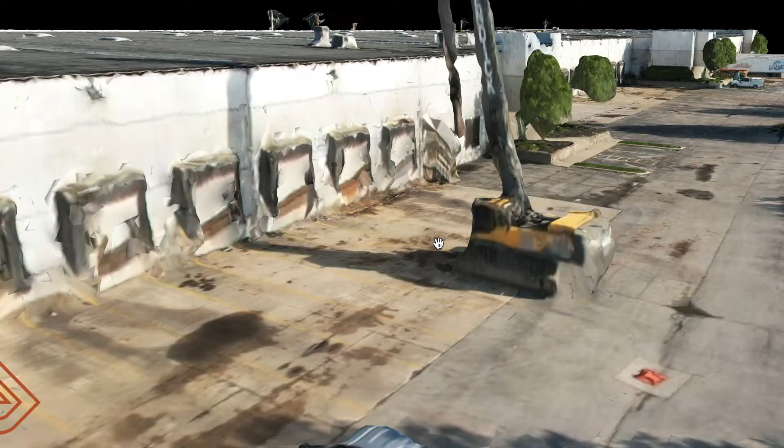So I work for this company called FlyGuys, and you can sign up with them online just with your Part 107 commercial pilot's license and your driver's license. Since I have both of those, I just sign up online and then you wait for them to reach out to you with drone jobs in your area, and they're all across America.

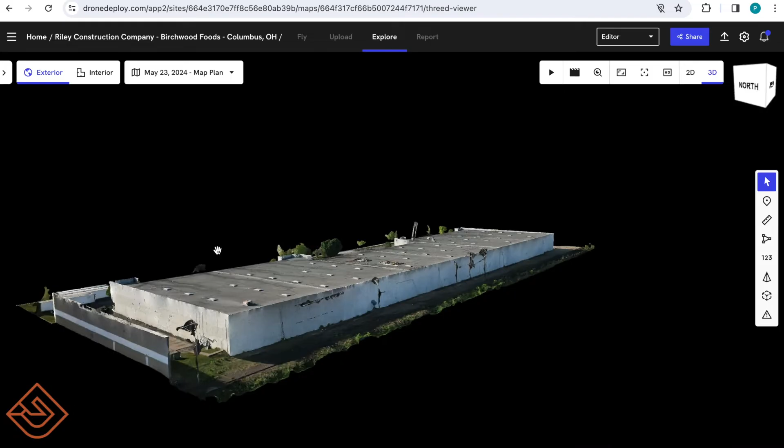The job I'm currently working on for them is a recurring job for a construction company, surveying the progress over the course of 12 weeks. So I go there once every 2 weeks and do the automated mission they've planned for me, then give them the information so the construction company can see how the progress is going. I'll be taking you on that journey today.

So the first step is before you fly, what you have to do before you go out to the job site. I'll be showing you how to do that today.

So the first thing that you want to look at is the airspace. I use this application or website called Aloft, and you can sign up with them for free, and they help drone pilots get authorization and prepare before they go out to their job site.

If I zoom out here, this is my job location right there where the marker is. It shows you the airspace in our city. This is John Glenn Airport, this is Class D airspace, and this is Class C airspace. As you see, where we're flying is clear, so it's in Class G airspace, which means we can fly there with no issues.

Seeing that that's clear, it says there's no advisories in the area, so it's safe to fly. So check, airspace is good.

The next thing we have to look for is weather. What's nice about Aloft is they include weather too in their application. So you just click weather, and you can see the wind speeds are only 1 mile per hour, which is perfect, super low.

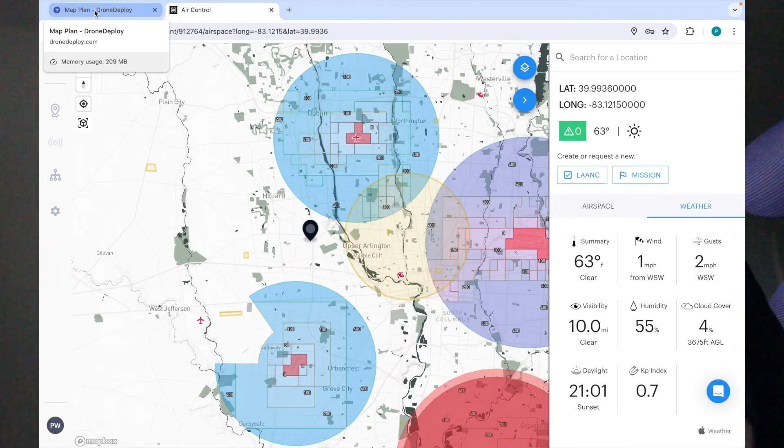FlyGuys uses this application called DroneDeploy, which we'll click on here, and I have selected the job that I am in charge of, which is the Riley Construction Company. There are all these different automated flight plans that they have for me to do today.

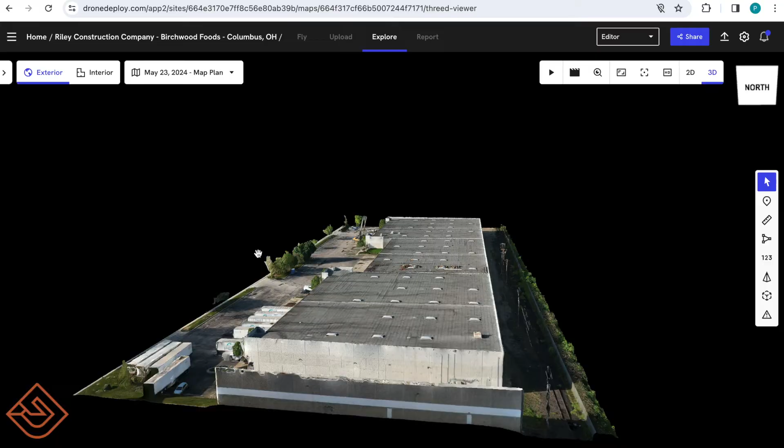So the first one is the map, and as you see, it is kind of a grid shape. At the end of this, it's going to give a 3D model of the construction site using photogrammetry, which will allow the construction company to analyze, look at, and see the progress of the construction.

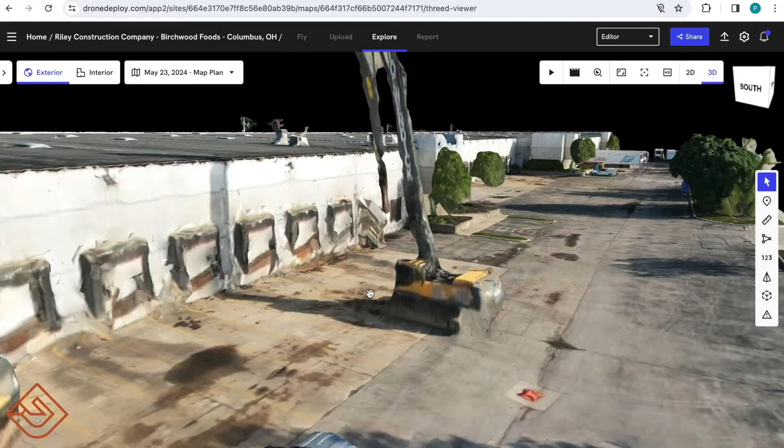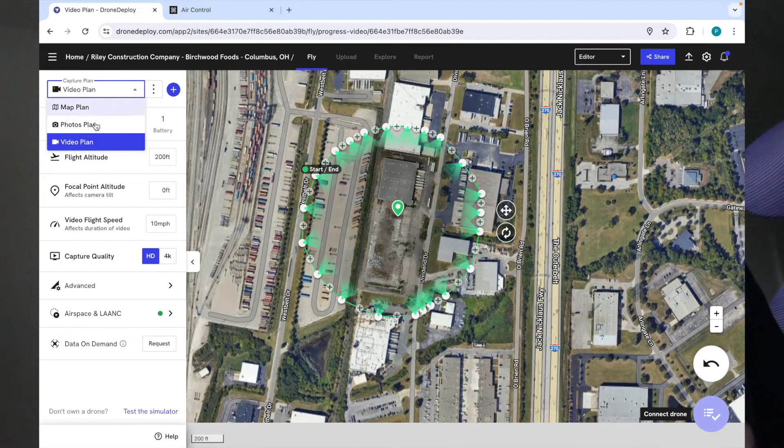The second thing is a photos plan, which just takes 8 different photos around the property to give a good view of it. Then the last one is a video plan, which just circles the construction site and takes video of it. So in total, this is 5 minutes as you can see, and the photo plan is almost 3 minutes.

The map plan is 15 minutes. So in total that's going to be over 20 minutes of flight, and since I only have 3 batteries to use, that means we're going to have to use at least 2 batteries, because each battery, depending on the wind, is going to be around 16 minutes of flight time.

So good thing we have enough batteries. We got to make sure they're charged before we head out.

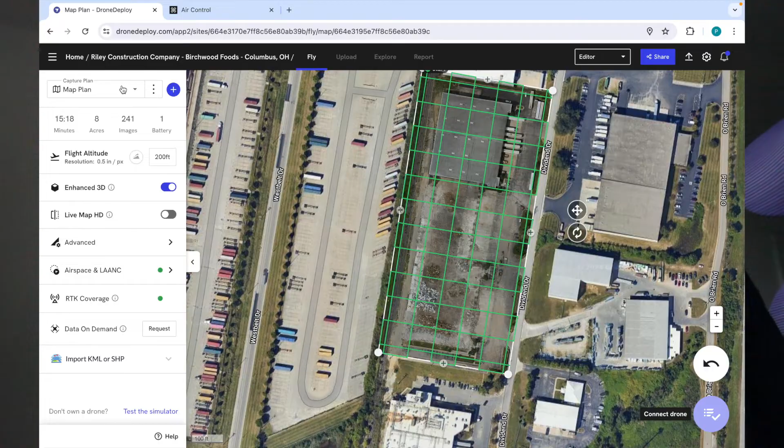The last thing that we have to look out for before we go to the job site is equipment, making sure that we have everything we need so that we don't forget anything and have to drive back home, pick it up, and then go back to the job site, which just wastes time and in the end wastes money. So let's do that right now.

So this is my equipment. I have the DJI Mavic Air 2S, which is a great drone for simple surveying missions or photography or videography. The first thing you want to check is your battery life.

I have 3 batteries, and as we can see, they're all full battery, which is great. You do not want to have to recharge your batteries once you get out to the job site.

The second thing is the battery health of the remote that I have, which is at 3, which should be enough. And then the next thing you want to check is your SD card.

Make sure that your SD card has enough storage before going out, because you don't want to have to pull out your computer, plug in your SD card, take off the photos or videos from your last mission just to free up space. That just takes time, wastes money, and you want to make sure you have enough before you go out to your job site.

This is my charger. You always want to bring your charger in case there's a malfunction and you need to recharge your battery. In addition, I also have a car charger port, which allows you to charge up your batteries in your car while you're doing your missions if need be.

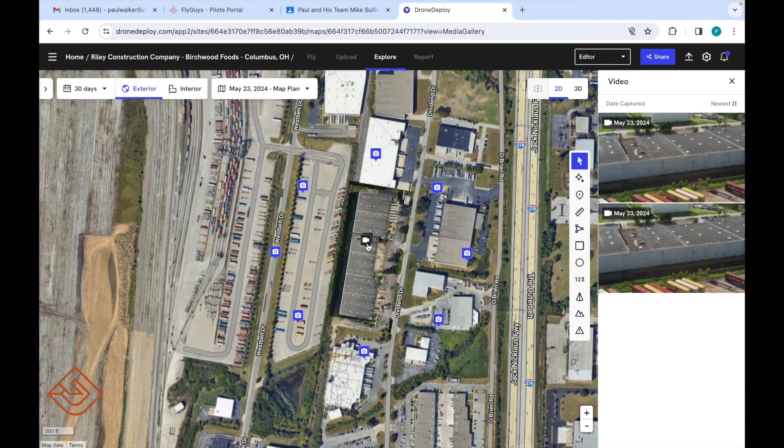So now that we're back home, it's time to upload all the photos, send them to FlyGuys so that they can then send them to the construction company. So I upload it to their website, and then I upload it to Drone Deploy. And that's it.

So these procedures are really important to follow, even though it's not my first time doing this. If I forget even one thing on my flight, then that just means I'll have to probably go back to the job site or go back home, and that's just more time wasted and less money made.

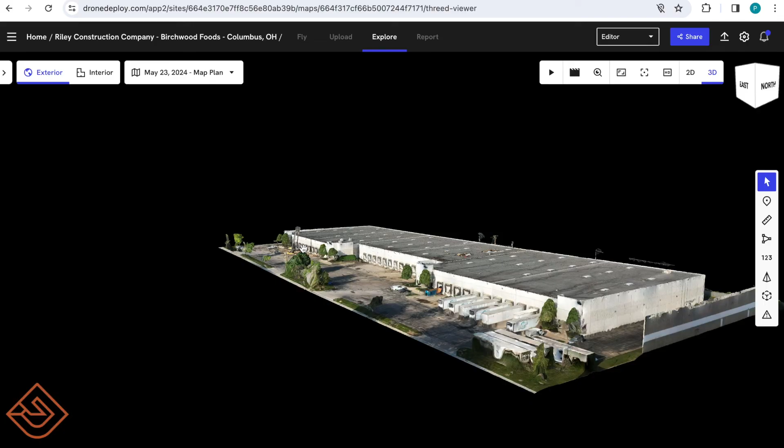So it's really important to follow these procedures for me because I've definitely made my fair share of mistakes and I don't want to keep making those.

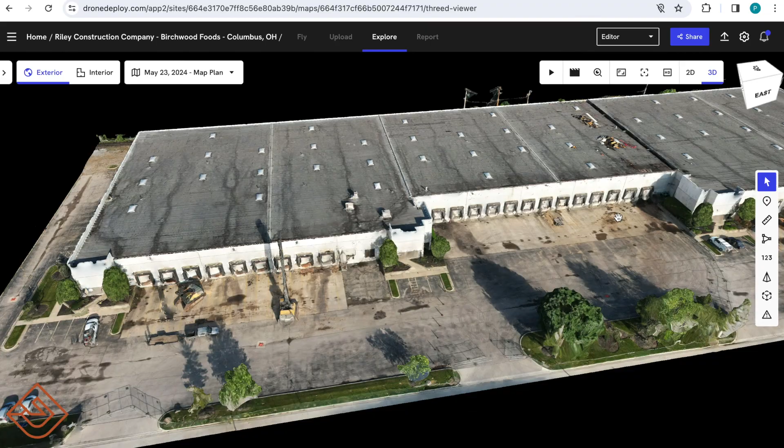Overall, I really enjoy my job. Doing what I do is just super fun. Flying drones, I get to make my own schedule, I get to travel, but there's also its fair share of challenges, because if there's not as many jobs in your area, then you can't work as much, so it's inconsistent. But it's a great summer job, part-time thing to do to gain flight hours, gain experience.

And I'd highly recommend it, and it's worth a shot. So good luck to you, and thanks guys for watching what I do as a drone pilot.